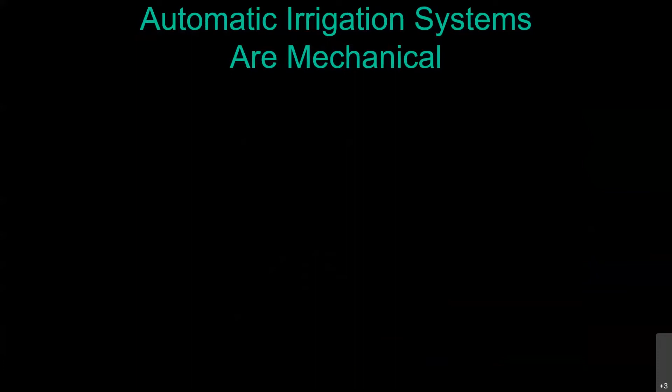One of the things we have to remember is these irrigation systems are mechanical in nature. So that means just like our cars, they need to be maintained. You need to change your oil at regular intervals. You want to rotate your tires and all that sort of thing. But just like with our cars, maintenance is going to take care of most of the problems you can have in your irrigation system before they become big problems, or at least you're going to catch them before they become those giant water bills, mainly just by paying attention.

So yeah, you can kind of try and save some money and not get your oil changed for a while, but if you push it too far, you're going to find out just how expensive it is to put a brand new engine in your car. That's not where you want to be at, and you don't want to do that with your irrigation system either. I hate to tell you though, installation is only the beginning. These systems are automatic, they're expensive, but that's the problem with a lot of these irrigation systems: without maintenance, plant health can suffer, sometimes to death, especially with these drip irrigation systems.

You've got these drip emitters that are putting out the water at very, very low rates, 1/2 gallon per hour, 1 gallon per hour, 2 gallon per hour. It doesn't take much to get inside that system and clog up an emitter. And if you're not paying attention, now all of a sudden your plant goes into stress. And if you let it go far enough, well, that can be the end of it. The system can deteriorate to the point where replacement is the only option, particularly with drip irrigation systems, because the water works at a lower pressure in a drip irrigation system and the water is moving slower.

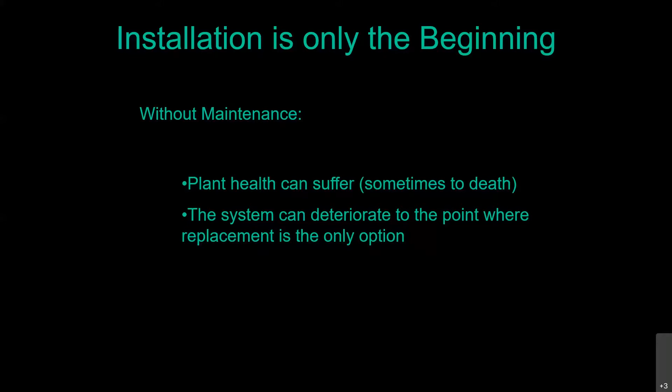So I've heard people over the years say with a completely straight face that these polytubing drip irrigation systems will last about 8 to 10 years. That's absolutely ridiculous. That polyethylene tubing is not biodegradable. What kills drip irrigation systems early is bad design, bad installation, and zero maintenance. You put those three things together and you're right. A drip irrigation system is only going to last you 8 to 10 years, whereas if it's properly cared for, there's no reason for not having this system in the ground 30 years after installation.

And of course, very important to all of us in the desert here is water can be wasted. We want to make sure we're not using any more water than what we need, because taking more water out of the reservoir that we don't need gets us in trouble, especially with all the issues we're facing with the Colorado River water. And I don't know if anyone's been up to Lake Mead lately, but as you pass over that bridge and you look down at Lake Mead, you see that big giant white ring around there. That was where the water level used to be. So we want to make sure that we're doing everything we can to keep that water up in the reservoir so we can survive this climatological drought, not a water supply drought.

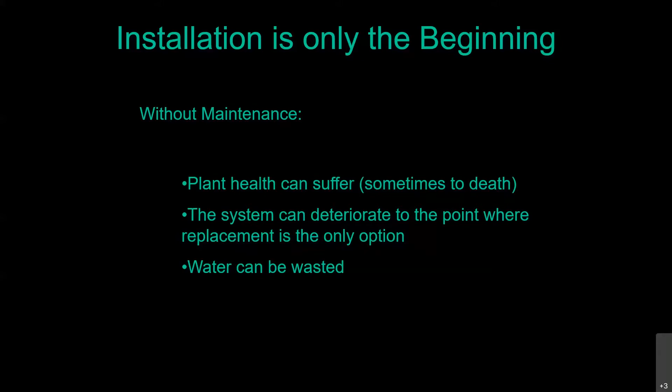We have adequate water for what we need, but the climate side of it, if we're not careful, that system is going to drop down to the point where all of a sudden we have to start imposing restrictions on people. And that's not what we want to do. We want to help you use your water wisely. We don't want to become water cops.

So not only do you have an irrigation system, if you're like me, you came to the desert from somewhere else. I just happened to do it a long time ago, where back where I grew up, our concept of irrigation was just waiting for it to fall out of the sky. It worked really, really well. But here we've got these automatic irrigation systems. So we've got our sprinkler systems for our grass. We've got our bubblers sometimes for our large high water use trees. That's an effective way to water those.

And even if you're not from here and not familiar with irrigation, when you see a sprinkler head pop up and start sprinkling water on the grass like a rainfall event, it's kind of easy to understand what's going on. But then we have these drip irrigation systems where you have these little black skinny tubes sticking out of the ground. It's a much more alien irrigation system, especially to newcomers.

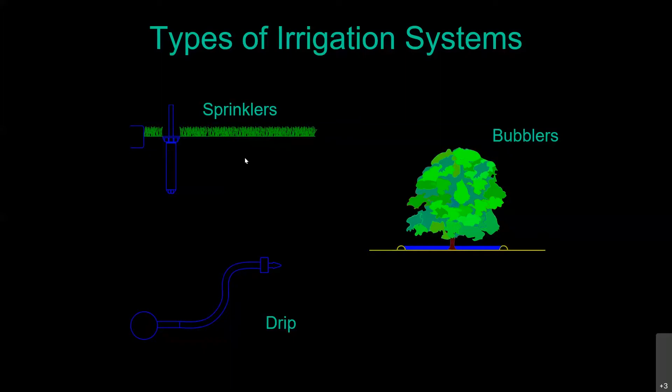So kind of a start to finish on your components of a typical drip irrigation system is you're going to have, if it's an automatic system, a controller mounted on the wall or inside your garage. Now where the water supply is coming into the house, that's typically where you're going to make your connection, and hopefully you have a good backflow preventer. That's going to keep the water, once it goes into the irrigation system, from being able to come back into your drinking water. You want to make sure you have that proper backflow prevention.

With this style, we're actually able to install our irrigation valves underground in those boxes so they're protected, and it also means we don't have to look at them. That's one thing about irrigation components. It's mechanical, it's engineering. It's not all that attractive, so we go to great lengths to hide this stuff.

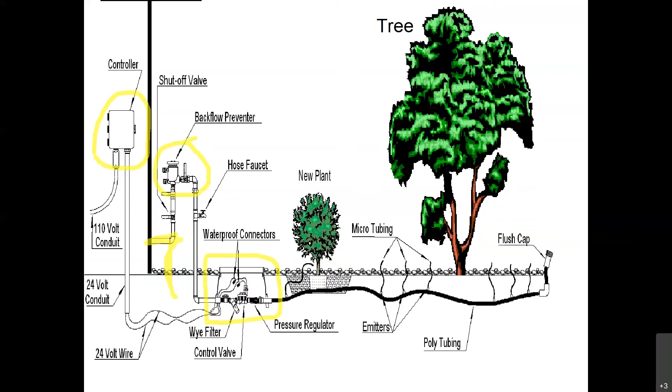I've joked for years that we do these classes where we talk about plants, and if we accidentally mention the words hummingbird or butterfly, we'll get 150 people signed up for that class. When we teach classes about irrigation, how to design it and put it in and how to take care of it, we get 20, 30 people for that class. Plant people get all the glory. Us irrigators are merely tolerated. Because plants are pretty and people like to look at them.

Now with the drip irrigation system, it does work at low pressure, so you're going to have a pressure regulator down next to that valve. And because those emitters have very, very small holes to let out that water at that slow rate, you're also going to have a filter. And we're going to actually show you a real one, so you're not just looking at a picture.

Once you leave the valve box, that's where you transition to your flexible poly tubing, and you're just putting in your emitters wherever you need them. And at the end of every line, you want to make sure you have a flush cap so you can access it and clean out that tubing. Let's get rid of our annotations there.

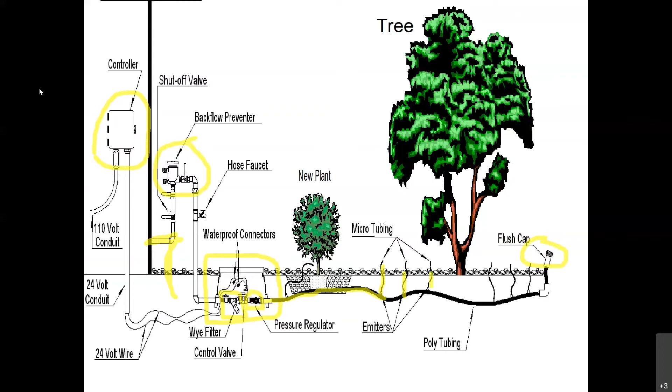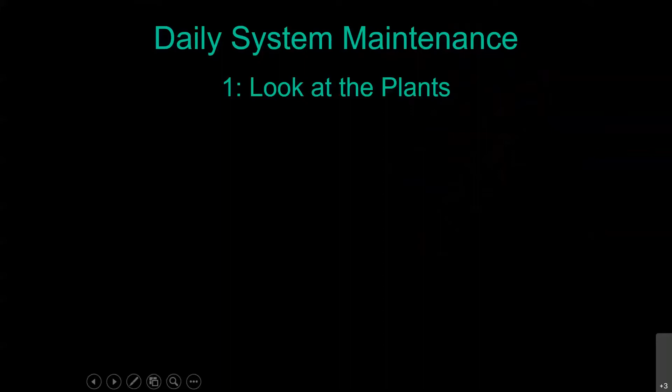Okay, so now for any type of irrigation system you always have your daily irrigation system maintenance, and thankfully we're not all in a room together like we normally do because nobody's giving me dirty looks or throwing anything at me. Really all I'm talking about is just paying attention to what's going on. First thing you want to do is look at the plants. They're going to be great indicators of what's going on with your irrigation system.

So you can see all the different signs of overwatering or underwatering in that fantastic brochure called Landscape Watering by the Numbers. If we were all in the room together, I'd say it's included in your packet. But it is available both in hard copy from your conservation office, and it's also available in a digital format.

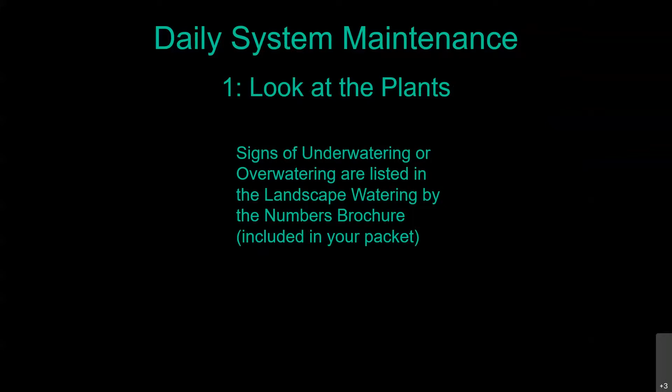But it can be a little bit confusing, because when the very brand new leaves at the very ends of the stems are wilting in the afternoon, people assume that's underwatering. It's not, it's actually overwatering. Now, if your leaves are turning brown, and especially if they're curling upward, that's definitely a sign of underwatering. But really the way to find out is to use a soil probe. Just a nice long metal rod. It will not push into our dry soil, but it will slide with little resistance through the moist soil. So that way you can really tell what's going on with the moisture level in your soil.

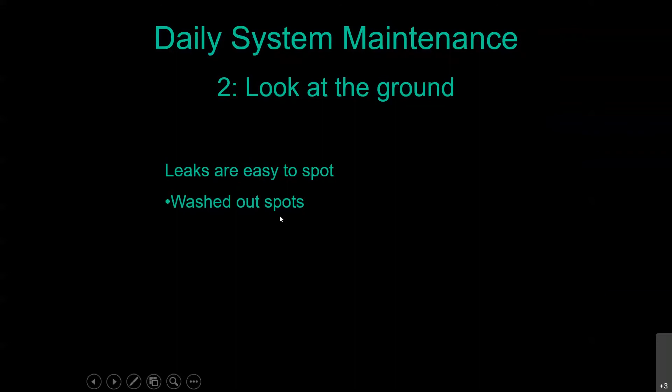Go ahead and look at the ground. So go ahead and take a look out there for leaks. They're pretty easy to spot. We have our desert plants out there, but the yard is not completely covered wall to wall in plants. So you can look for those washed out spots. So even without turning on that irrigation system, we knew we had a leak in that drip line there. So we needed to get in there and make a repair.

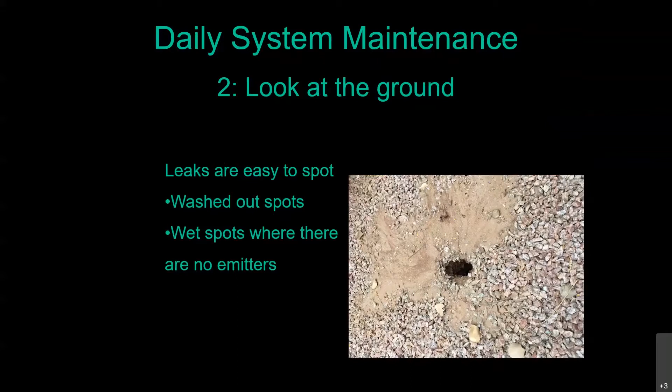And also pay attention when you're starting to notice wet spots and you don't have any plants or emitters there; it's time to turn that system on, go out and find out what's going on. The last thing you want to do for daily system maintenance is just pay attention to your hardscape.

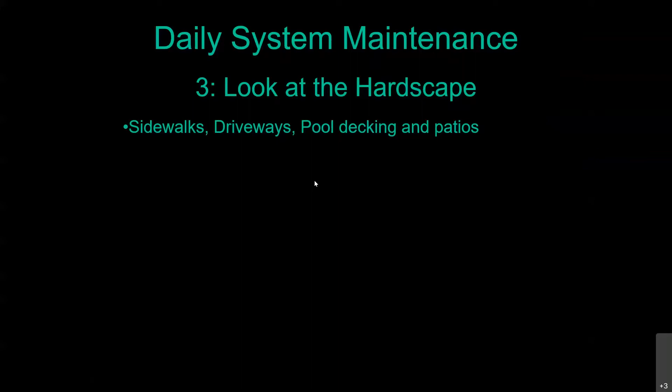So you're going to be looking at your sidewalks, your driveways, your pool decking and patios, and you're going to be looking for any of the staining you'll get from the minerals we have in our water. And the ones we're really thinking about here are the calciums and the salts. So definitely pay attention to your walls and fences, especially if you have sprinkler systems, like in this example.

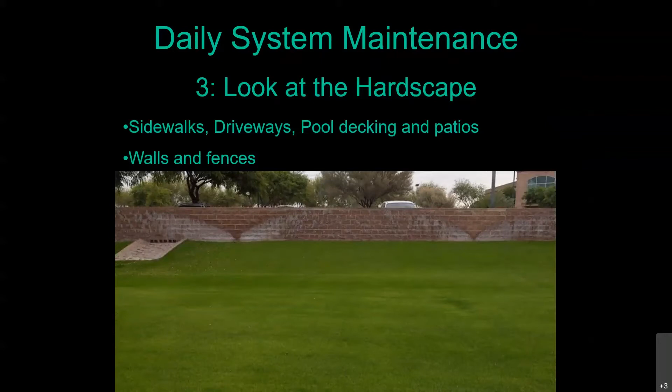They're just using the big rotor sprinkler heads that rotate back and forth, and they've got them out of adjustment. So every time they get to each side, they continue to turn and they spray that water up against the wall. So now that beautiful colored block wall they have there has got all those calcium stains on it. But seeing those stains on your flagstone or your brick patio decking and things like that, you might have a blown emitter out there that's actually shooting water over onto your patio. So it's time to turn that system on and see what's going on.

So for monthly system maintenance, no matter what type of an irrigation system you have, this class, when we do it normally in person, it's a 3-hour class. And to try and shorten it up, I took some of the common components out of any irrigation system that you would do for maintenance and put them in the beginning. I just forgot that I broke it up into the individual ones this time. So we're just going to cover them here, and then we'll get into the drip irrigation specific stuff. But these are things you want to do no matter what type of an irrigation system you have.

The first thing you want to do is turn the system on. Turn it on in the daytime. We run our irrigation in the middle of the night so we don't lose as much water to evaporation. So you want to actually turn it on in the daytime. Don't go out at 2 in the morning with the flashlight to inspect your irrigation system. The other thing is while you start at the controllers, you want to make sure you have the correct program in there for the season.

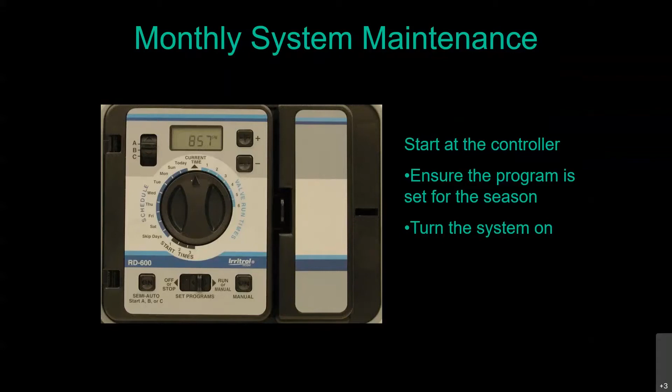People do not adjust their irrigation timer programs often enough to account for the changing weather. The old joke is if you don't like the weather, wait 5 minutes, it'll be different. Some weather component will be slightly different from 5 minutes to 5 minutes. But definitely at least 4 times a year, change your watering schedule, or even better yet, once a month. So you're going to go ahead and turn the system on. There's another great reason to start at your irrigation controller, and that's because you're standing up and you're still dry and not muddy.

So for semi-annual system maintenance, no matter what type of a system you've got, if your controller has a backup battery in there, that's designed to retain the program information in case the power goes out. So very often in the back of the panel, you're going to find a typical 9-volt battery. Do check with your controller manual as far as what type of battery to put in though. If your controller uses a rechargeable 9-volt battery, every 6 months is too often to do it, because the controller is constantly recharging that battery when it has power. What you don't want to do is put a regular alkaline battery into that controller, because recharging regular alkaline batteries is a bad idea.

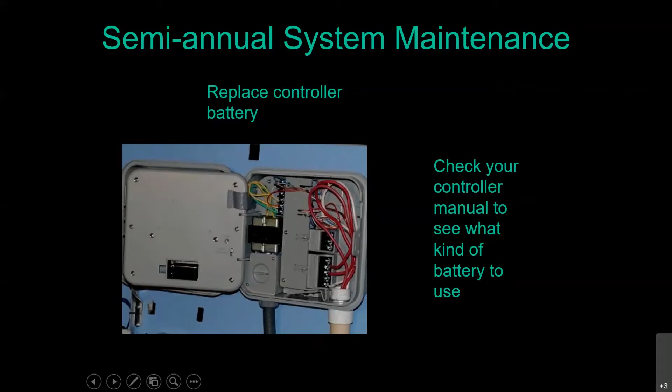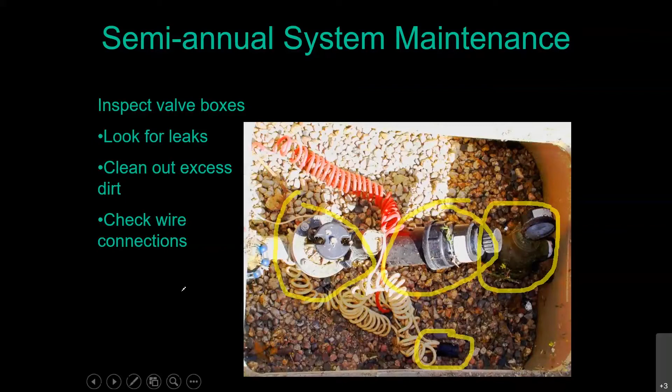One of the most common electrical failures you'll find in irrigation systems is people do not use the right connectors inside those valve boxes. So what I'm going to do here is drop out of our presentation so I can show you what we're talking about. Let's get up to stop share. There we go. Okay, I got a pretty good sized view on me. Unfortunately, many people will make those wire connections inside that valve box with a typical wire nut. These make good wire connections.

This is what's going on inside the walls of all the buildings and things like that. But what's done here is the ends of the two wires have just been stripped of some of their insulation, and you put it on and twist it until it's snug. The problem is underground in a box with a lid on it, there is a lot of condensation and moisture in there, so the exposed copper at the ends of those wires will begin to corrode. It's a very, very low voltage signal coming from that controller, so a little bit of corrosion here means the signal never gets to the valve and it doesn't open.

What some people will do is they do make a type of wire nut. This one is actually larger than what you would probably use. I use this to pass around so people can see. But these are filled with silicone, and they've got those little flanges there to make sure the silicone doesn't leak out. So this still works like a standard wire nut. You put it on and twist it. The problem with these, though, is if anyone does need to replace that solenoid on that valve, they're going to take this off, replace the solenoid, and then put it right back on. There's no more silicone left in there, so now it's just a standard wire nut.

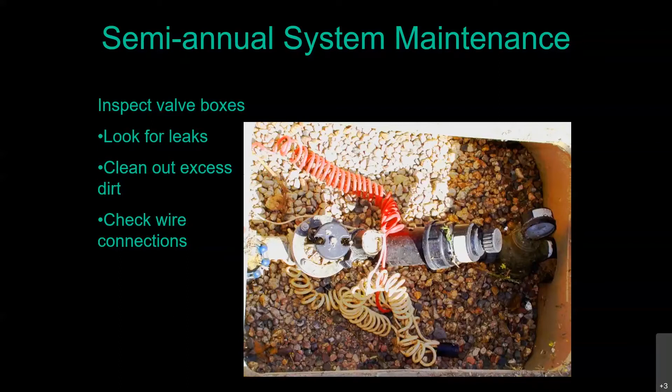That means I'm not talking about bugs or termites. I hope you did not put in an irrigation system for the termites. What's attracted to that moist soil is the roots, especially tree roots. I don't have the sample anymore because it got too old and dried out and crumbled, but I had a sample of an irrigation valve I removed that was completely engulfed in tree root just from a very small leak inside that box. So make sure they're not buried in the dirt.

For annual system maintenance, no matter what type of an irrigation system you have, you may want to consider when that backflow preventer was last tested. So the most common type and the most preferred type we see out here is the one I'm showing in this picture. That's this guy right here.

That is called a pressure vacuum breaker. So this is an assembly that can be tested. It does have the ports here where a certified backflow tester can hook up his gauge and trick that assembly into thinking the water's running backwards and make sure it's functioning properly.

We do require commercial customers with dedicated landscape meters, which aren't serving anything inside, so it's not anything to do with human health or safety, to test every year. If they don't test them, and we remind them and they still don't test them, we will shut off the water to that irrigation system and lock that meter, and they can't have water for that landscape until they test that backflow preventer and ensure that our system is protected and your drinking water is protected.

A residential backflow preventer being tested every year is overkill, but if it's been about 3 to 5 years, you may want to consider having that done. You can usually find a list of certified backflow testers, certified by the state, with your local water department. Call a bunch of them so you get a good idea of the current rate for testing those assemblies. Most contractors are honest, hardworking people, but there are thieves and crooks out there, so make sure you have a good understanding of what that cost should be.

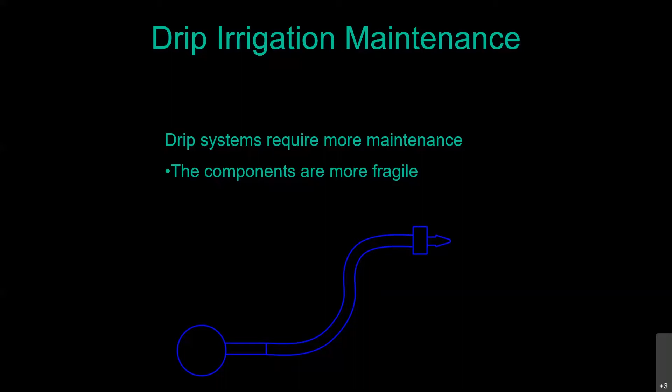Instead of just punching in new holes and connections into that flexible poly tubing when you add new plants or need new emitters as plants grow, you're cutting out pieces of that PVC pipe and gluing in a new fitting so you can attach a new emitter. If you don't know where your poly tubing is and you're digging holes in your yard, I recommend you have it on and running when you're digging. That way, if you accidentally hit it with your shovel, you'll know right away you need to do a repair and flush that dirt out of there.

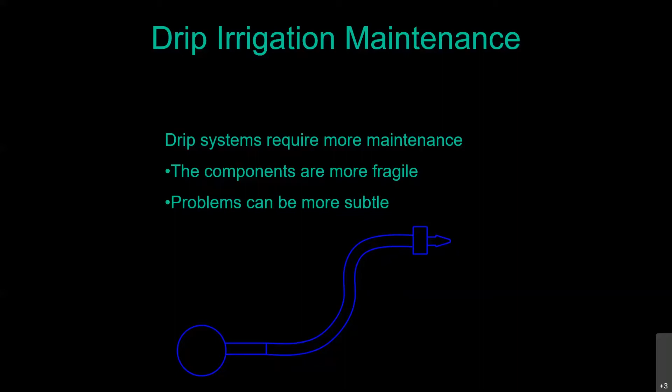The other thing is remember, it is a low pressure system, so the problems can be a lot more subtle. People with sprinkler systems who've had a broken sprinkler head recognize that right away because they've got a 20 or 30-foot geyser of water coming out of the ground. You do not get that with low pressure drip systems, so take the time to get out there, walk around and inspect it.

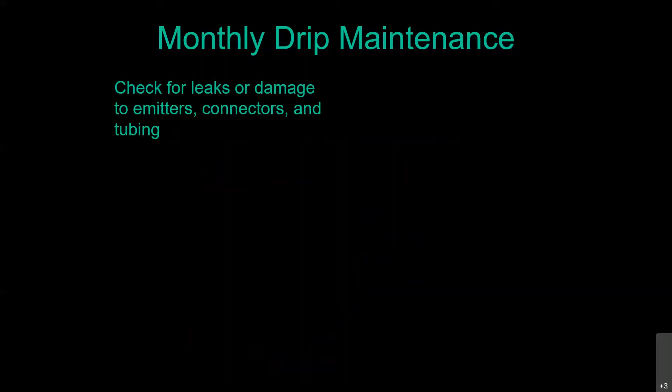For monthly drip irrigation system maintenance, turn the system on and walk through the yard to check for any leaks or damage to your emitters, connectors, or tubing, and make sure those emitters are flowing at the correct rate. Make sure you don't have clogged emitters, that they're not blown and putting out more water than they should, and that your emission points are still visible.

There are two things underground you do not want in your drip system. One of them is the ground. Dirt is the enemy of a drip emitter. The other thing is, remember what in that yard is attracted to moist soil. So make sure you don't get any tree root intrusion into your drip system.

If somebody who put in your drip system did not bury that poly tubing at the correct depth, it should be 6 to 8 inches below ground. It does have a nasty habit of working its way back out of the ground. That's going to deteriorate very, very quickly in our sunlight, become brittle, and it is a leak waiting to happen. So make sure you get that stuff underground right away. If it's got that shiny crystalline look to it, it's already been degraded by the sunlight. Cut it out and put in a new piece of tubing.

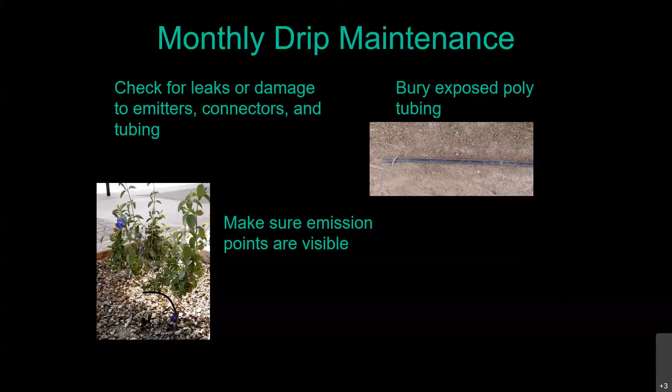And you may want to consider, even the best gardeners out there are going to have plants die. Plants are mortal just like we are. So if a plant dies in June, do you really want to go out at 116 degrees and dig a hole to put a new plant in the ground? You may want to just wait until fall, which is a better time to do planting anyway. It's better for you and it's better for the plant.

But do you want that emitter location to continue to run through the summer where there's no longer a plant? Well, that's where this guy comes in. This guy right there just plugs right into the end of that 1/4-inch tubing, and he's called a goof plug. You can pick those up anywhere, home improvement stores, hardware stores, or your irrigation stores.

So let's go back to that first slide. If you don't run into any problems and everything's working okay, this monthly maintenance check on your drip irrigation system on a typical residential yard is about a 3-minute stroll through the yard. This isn't going to take a lot of time. If you run into some problems, then you've got the time for the repairs, but just make sure you do it once a month, make sure everything's working okay.

You know, you pay a lot of money for these landscapes, and if you put it in yourself, you paid a good amount of money, plus you've got the blood, sweat, and tears involved in putting it in. So actually get outside and enjoy the yard. Don't just look at it from your kitchen window.

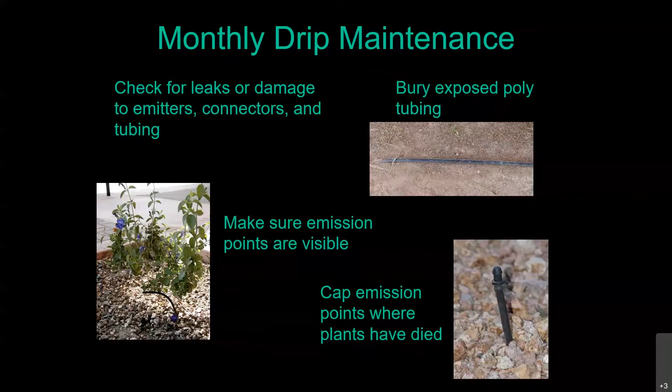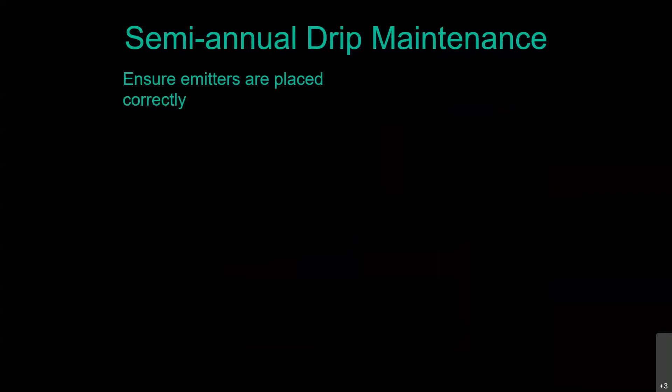One thing you want to focus on when it comes to irrigation, stop thinking about watering plants. You're not. The thing that you're watering with your irrigation system is the roots. And once you make that transition in your thought process, how we tell you to do these things all of a sudden makes a lot more sense.

So here we've got a commercial site, I took a photo of this because it was so wonderful. The designer who did this irrigation system knew that nobody was going to move those emitters out away from the base of the tree, and they were not going to add more in as it grew. Because as that tree gets bigger and bigger, it needs more water delivered to it when you water. So he actually specified he wanted 6 4-gallon per hour emitters.

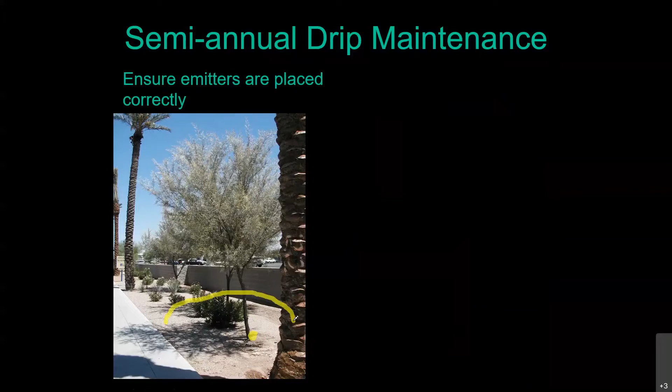And what he wanted was one of them right at that original root ball, where that container came from the nursery. And he wanted the others spread out here, where the future edge of the canopy of that tree is going to be, what we refer to as the drip line. So while you're waiting for that tree to grow and you're irrigating out in areas 10, 15 feet away from the tree, you could argue that you're wasting water because during the first couple of years, you're watering in an area where the roots haven't gotten to yet.

I work in water conservation, but I live in the real world. Nobody moves those emitters out. Nobody adds them in as time goes on. So in our design and installation class, we tell you to put them in at the time of install.

Now, on a residential scenario, if you don't want those outlying emitters to be watering until the tree actually needs them there, don't forget about those goof plugs. You can just temporarily cap them off. Later on, clip off your goof plugs, put your emitters on, and you're in business with the right amount of water in the right place for that tree. And you didn't have to do any more digging. Unfortunately, the person who did the install did not quite understand the concept of what he was supposed to do.

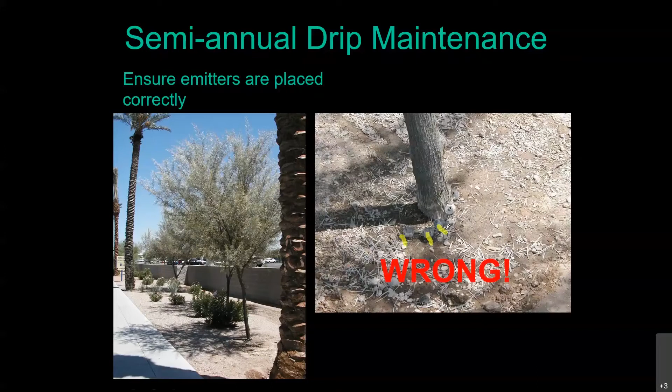So what you see here is 1, 2, 3, 4, 5. Emitter number 6 was right around the backside of the trunk of that tree. So he did put in the right emitters, but he certainly didn't look at the installation details and put them in where they were supposed to go.

So the other thing that's going on here is, do you see that nice little white ring on the trunk of that tree? It's called the Salt River for a reason. There is a sodium content in it. So fortunately, that particular species is pretty salt tolerant, and it hasn't been killed with that yet.

Another thing that's going on here is, look at how moist that soil is around the trunk of the tree. So remember, when our soil is dry, it's the consistency of concrete. Before we want to dig a hole, we know to get it wet so it becomes plastic and pliable. Where the tree is anchored to the ground, would you prefer the texture of concrete or the texture of Play-Doh? This is why trees fall over.

This is why every time we have a storm, you look at the evening news and you're going to see some poor weather person out there standing next to a tree laying on the ground. So what you do want to do is water at what we call the drip line. Now you also want to do this with the shrubs, but I'm really using trees as the example because it's a lot more obvious. So this is where the water absorbing roots are.

All the water absorption on your woody shrubs and trees happens at the very ends of the roots. And that's what you want to encourage to grow deep and wide, because the roots are what bring up the water and the nutrients. They're also what hold the tree upright in the ground, even in our big windstorms. So even with your shrubs, you want to do this because not only is it the right place to water, they're also easier to inspect and repair if they do get clogged up.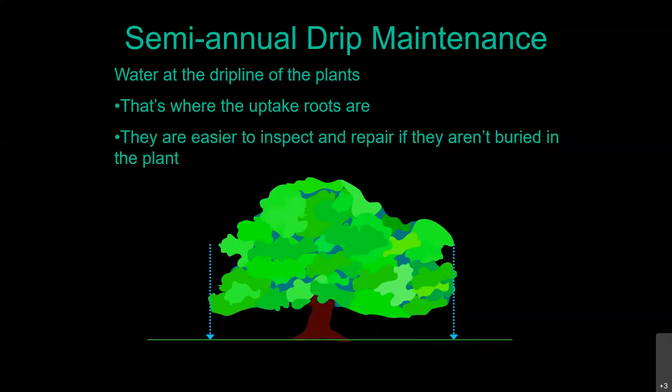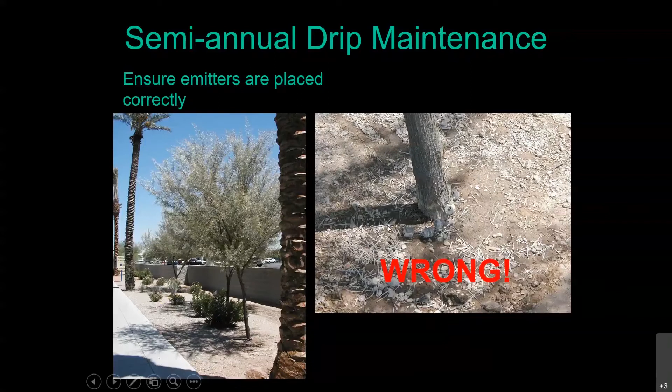When you first plant them and you have your emitters out here where they're not needed until the tree grows there, remember those goof plugs that we showed you? That's what you're going to put in those locations until the tree actually gets out to the point where it's going to utilize the water from there. Whereas in this scenario, they're just completely in the wrong place where they were all put right up on the original root ball and never moved out. Cool. Perfect. Thank you.

Okay. So what happens if we don't move them? Well, sometimes the trees ignore our foolishness and they ignore those emitters that are still right up at the trunk and they put out their roots anyway. Sometimes you can get lucky that way. But many of our desert trees have the adaptation. They've evolved over the eons, knowing that rain events in the desert are very few and far between. So during the rainy season, they do all their growth up on the canopy. During the dry season, they do the root development.

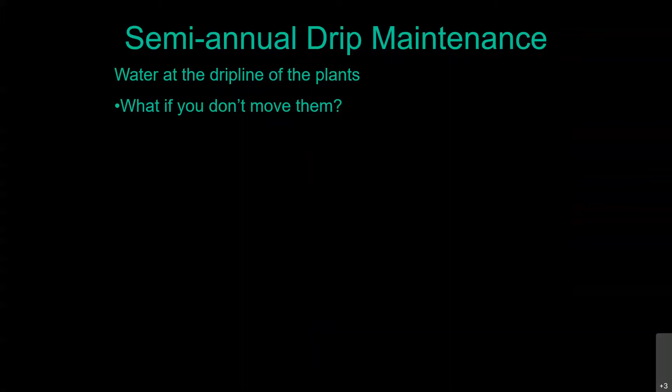So now you've got all these trees in the urban landscapes out there with 3 2-gallon per hour emitters at the base that are never moved away, and they're running 3 days a week year round. You don't have a dry season. So sometimes what you will see happen is this. That was one of the hybrid Palo Verdes, and when it was standing up, it had about a 25-foot wide canopy. Now, this one did go down in the rain, but it was a winter rain. There were no high winds involved. It was just a nice, slow, steady rain that soaked into the ground and saturated it.

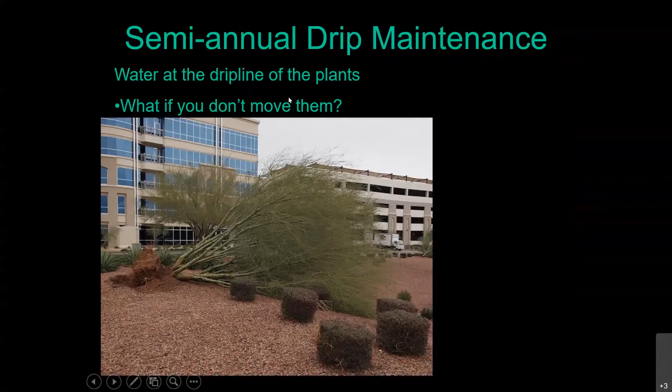So when I started walking up to this to take some photos, I mentioned to my coworker, boy, they really spent a lot of money on that tree. They put in a 48-inch box tree. How could I know what size that mature established tree came from the nursery in? That's 48 inches, and that's 48 inches. That tree just never bothered to grow roots. They actually tried propping it up and tying it back to the ground, but at that point the root system was so destroyed and damaged, it just ended up dying and had to be replaced anyway.

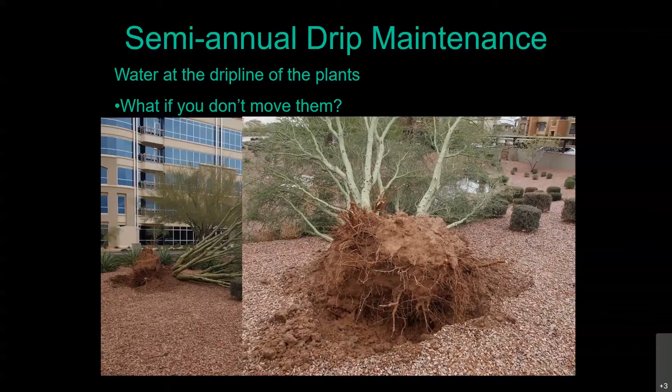So you're going to have a lot more success by making sure the focus of your watering is on the roots, not on the shrub, not on the tree. You're watering the roots. You'll be much more successful. Here's a couple more examples of that real quick. Once again, I could have taken a tape measure to that and measured 48 inches. Magical.

Okay. So for annual drip system maintenance, only once a year, you're going to want to flush out those filters. The water that comes from our water treatment plants is very, very clean. There's nothing in it. However, how many miles of pipe does that water go through before it gets to your house? And how old are some of those pipes? So you can get some sedimentation from our water distribution system, and it will clog up your emitters. That's why we put filters on those drip systems.

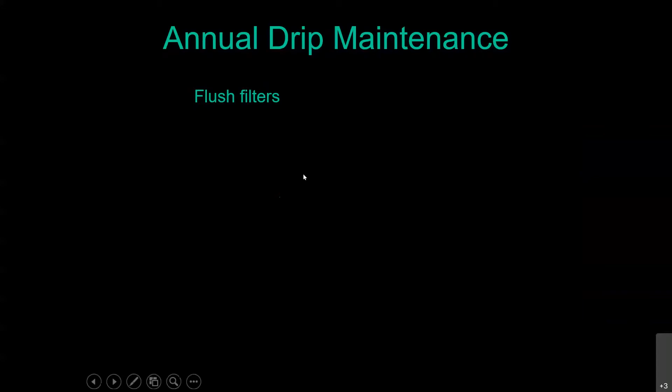So once a year, you do want to flush them out and actually take them apart and inspect the filter elements. I'm going to drop back out of our presentation so you can see what these look like. There we go. Most of your filters are in this configuration. They're what we call a Y filter. What you're going to do is unscrew it, and inside there, you're going to see a mesh screen. Most residential drip systems use these ones that have a nylon mesh screen.

You can get them in different mesh, whether it's 100 mesh, 150 mesh, or 200 mesh. You want to make sure you're using 200 mesh screens in there. That way you're protected all the way down to half-gallon per hour emitters. Now, on this particular filter, to be installed correctly, it needs to be pointed downward, because that way when we open it up, anything caught in that screen will come out with this. If we did it the first way I showed you, everything's going to fall right back in there and go out and clog up your drip emitters. That's why most of your filters nowadays, there we go, here's our big display, have this flush cap on top.

So what you're going to do is before you open it up, you're going to take this cap off, and then you're going to actually use the valve itself to manually open it. So you're right here and can see what's going on rather than back at the timer. And the water's coming in this direction and you're in front of the pressure regulator. So you're at full pressure and that water is going to shoot right out of that valve box in a

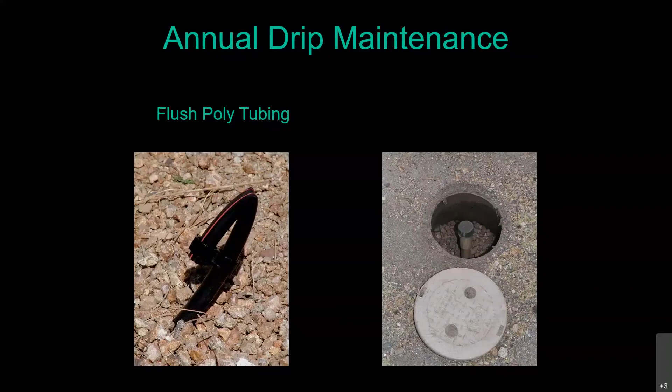A preferred way to do it is to actually install them down underground in this box, but in this case we want to use a threaded cap inside there rather than these fold over ones. These fold over ones, if they're inside the box, you're not going to be able to open them up. So real quick, we're going to show you what to do if you're kind of looking at an overhead view of an irrigation system here.

So on this irrigation system, we do have a separate valve for just our shrubs and then a valve for just our trees, the yellow line here. So very typically on your residential irrigation systems, they will do it in one long run, like what they're doing with this tree here. And in this case, we're going to have a flush cap right there.

So we're going to open it up and we're going to turn that station on either manually at the valve or at the timer. And if you have not flushed out your system and you've been in that home for multiple years, I want you to be standing over here so you can see what the water looks like when it first comes out of that tubing. You will become a firm believer in flushing out those lines once a year because the water, what first comes out of there looks like kind of a mixture of Kaopectate and chocolate milk.

Now that's one big long run on there. However, on our shrub line, we're using more of what we call a trunk system. So here's the red line and the red valve for our shrubs. We're coming out to here. Here we have a flush valve. We're also, oops, let's not move that. We are also coming over here to these shrubs and we would have another flush cap there and another flush cap here and another flush cap here.

In that scenario, what you want to do is start with the one that's closest to the valve and you only do them one at a time. Don't open all 4 of them at once and turn on the valve because the water is just barely going to ooze out of each one. You're going to do them one at a time, starting with the one closest to the valve, so that way when you're doing the one that is furthest from the valve over here, you've already flushed out this segment of the tubing by doing it first with this one. So it's going to make it a little bit easier to do it.

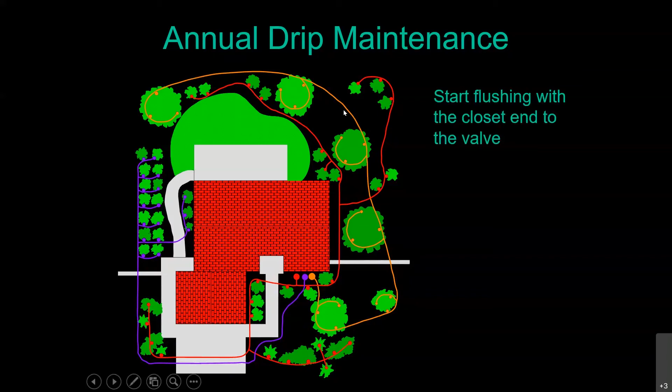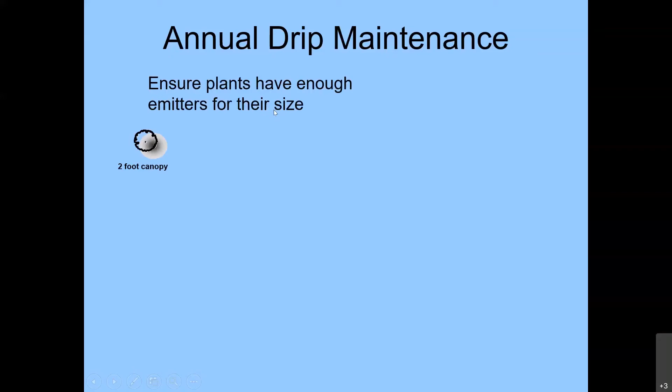Okay, so yeah, I had to change the color on the screen because I wasn't able to change the color on my drawings here. This is where, as these plants grow, you're going to consider adding in more emitters. Here we've got just a 2-foot diameter canopy plant, but you see the wetting pattern of that one emitter. We're irrigating a good 50% of that root system with one emitter. But as those plants, and especially our trees, start growing, you're going to want to start adding in more and moving them out. And here we've got a fully mature tree.

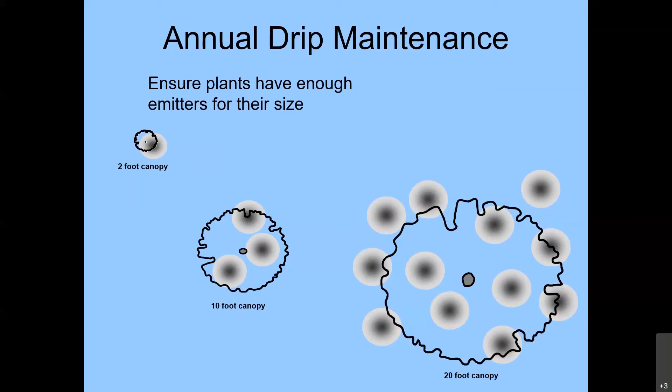Now, actually, some of these emitters that are still under the canopy may be emitters for shrubs. The majority of your water-absorbing roots are going to be out here, but the tree can still have some down under here as well. So I would actually count the emitter for that shrub as partly watering the tree. Hopefully, if it's a correctly designed system, your shrubs and trees are on different zones. This one isn't; this little guy right here just isn't watering as deeply as the ones that are specifically for the tree. So we'll show you in a little bit just how to add in more line for that when we get to the repair section.

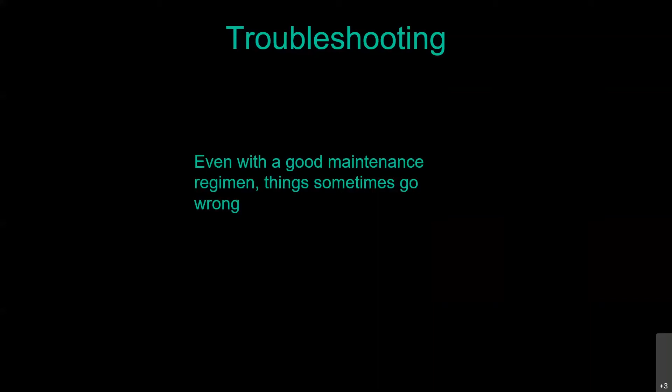Okay, so now let's get to troubleshooting here, and it's already 50 minutes, so we're going to go through a few of these things fairly quickly. Even with a good maintenance regimen, things will go wrong, and irrigation systems know when Home Depot closes, so it's Friday night at 11 o'clock when you hear the water gushing outside.

So some of your more common things here, and these are all included in the handout you received the link for, and that handout is for the full class, so it also has information on sprinklers and bubblers. Very often when things go wrong with the system, people automatically assume it's a bad timer. That's the part that's above ground, the part that people can see, so they always say, must be a bad timer. A lot of times it's either a programming error or the real problem is somewhere else in the system.

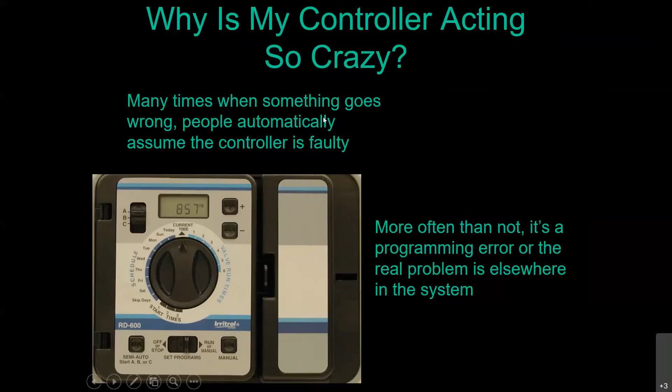So a really great one when I worked at Rain Bird Technical Service, where anyone in the country could call me toll free when they're having problems with their irrigation. Sweet little old lady was firmly convinced her timer was under some sort of demonic possession because the irrigation stations kept running over and over again right after themselves. The cause on this one is actually a programming error. She put in extra start times. She thought those start times started individual stations. They do not. One start time starts the cycle of all stations in that program, one after another.

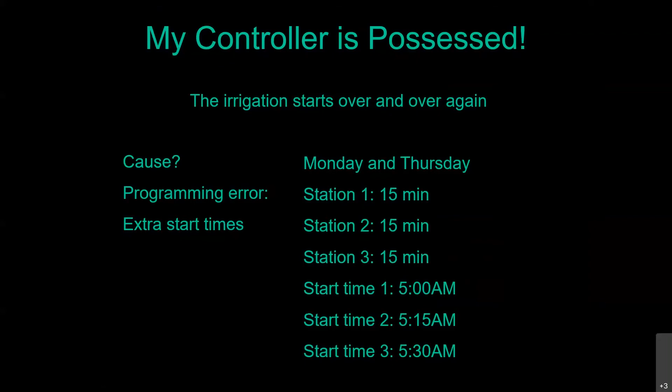So in this scenario, she had it set for Monday, Thursday, had 3 stations watering for 15 minutes because that's what she wanted. If she wanted one cycle of those 3 stations starting at 5 in the morning, she would put in one start time of 5 a.m. Unfortunately, she thought start time 2 started station 2, and start time 3 started station 3. So actually, each station ran 3 cycles of 15 minutes, one after another, for a total of 45 minutes.

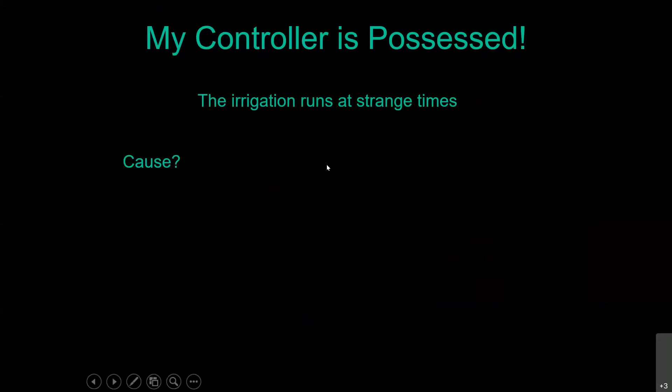Very common programming error. Another good one is the irrigation runs at strange times. Could be a programming error. Be careful of that AM and PM when you're doing the programming. If you get one of them wrong, either current time or start time, your 5 a.m. start for your sprinklers interrupts your 5 o'clock in the evening barbecue.

Or it could be there was a power failure and your backup battery has died and it's gone back to the default program, always in the number 1 or A program, set up to water every day, all stations for 10 minutes and 1 cycle. And they typically put in, depending on the manufacturer, either a 5 a.m., 7 a.m., or 10 a.m. start time. But when the power comes back on, the controller thinks it's midnight. So it's 5 or 7 hours later when the irrigation actually comes on.

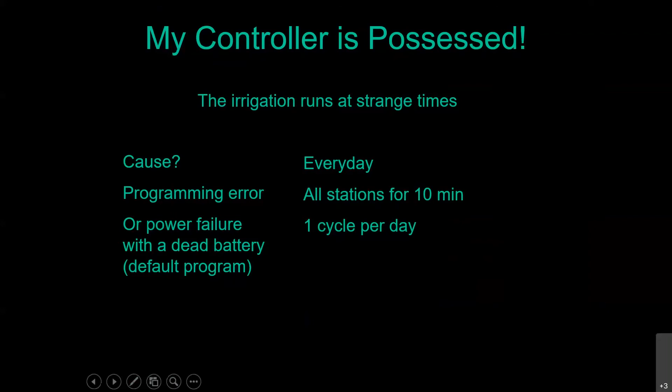So reprogram your controller and put in a new backup battery so you don't have to do that again. Another good one is the irrigation runs longer than the times that are actually programmed in there. This is still a programming error. A lot of these controllers have this percent adjust or water budget feature that runs a percentage of the programmed runtime. So we've got station 1 set to run for 10 minutes, but it actually runs for 20. That means our water budget is set at 200%.

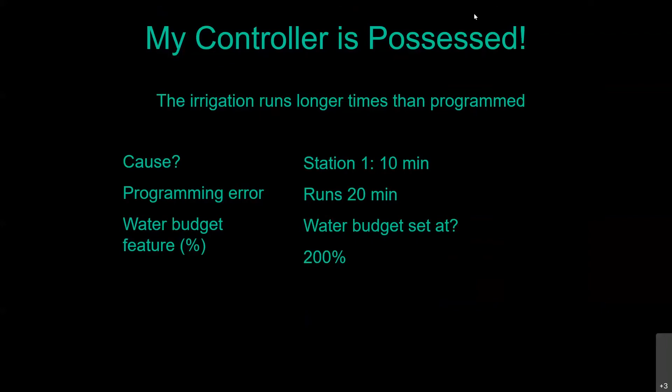Now, your newer versions of timers, I think the manufacturers got too many complaints about this being a bad timer. The old ones, no matter where you set that water budget, it would not change the runtime displayed. A lot of your newer models, if we change that water budget to 200%, now when we looked at the runtime for station 1, it would now say 20 minutes. But your older ones won't do that, so make sure you're very careful and pay attention to that function.

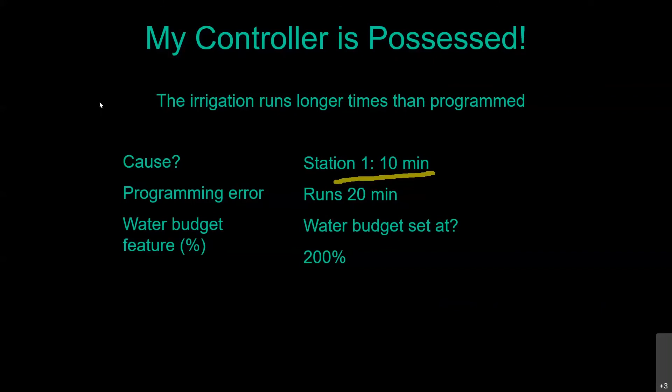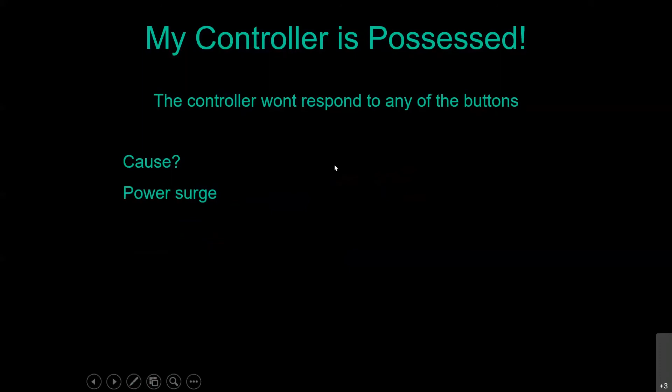Another good one is the controller doesn't respond to any of the buttons, no matter where you push the dial, how hard you push them. You've had a power surge that has locked up that microprocessor inside there. So what you're going to do is reboot that controller. There's no Control-Alt-Delete keys on an irrigation controller, so remove the power, turn off the circuit breaker, unplug it, whichever way it is. But what's inside that controller designed to hold the information on the chip if there's no power? Take out your backup battery. 30 seconds to 1 minute, power it back up. 90+% of the time, they fire right back up.

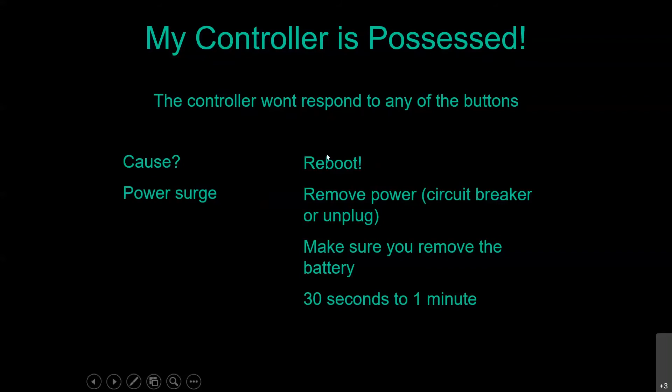Another good one is one station won't stop watering. No matter what you do, I turn the timer to the off position, it still waters. Well, first check for a programming error. Turn the timer off, and then if it stops, you know it's probably a programming error. But the problem on this one could actually be in the valve itself down underground in the box. We're going to do a real quick explanation of how to figure out what's wrong with the valve, and we're going to actually show you the inside of a valve so you're not afraid of repairing them yourself. So definitely turn the controller off. If it's still running, the problem is your valve, not your controller.

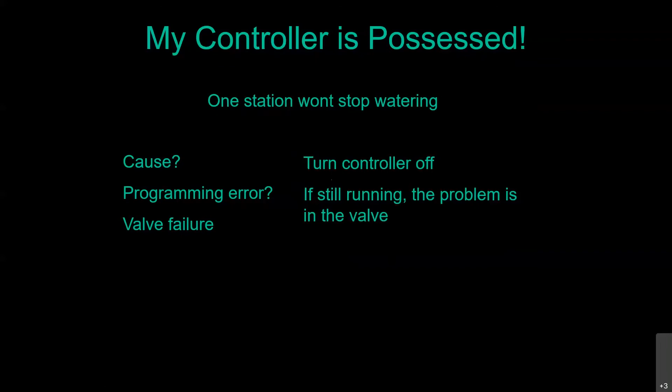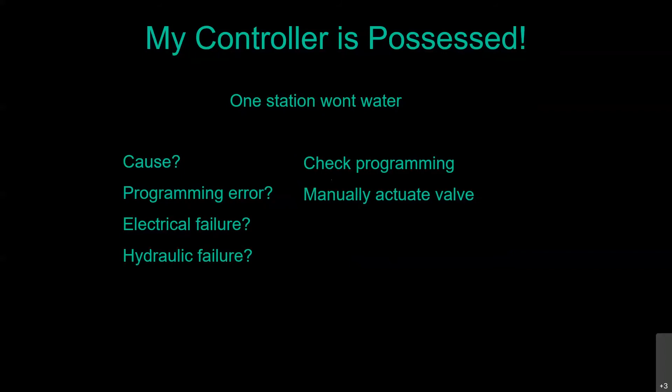Another one is one station won't water. Check your program. If you forgot to put in runtime for that station in any of the programs, it's not going to run. It could be an electrical failure, since these valves are connected to the timer by wires, but it could also be a hydraulic failure. The valves are actually using the water itself to open and close. So here, check your programming, manually actuate the valve like I showed you earlier, either that internal or external bleed.

If none of the stations water, the cause on this one could be a programming error. Always check that first. You're still standing up, you're still dry, you're not tired from digging a hole that you didn't need to dig. If you didn't put in a start time for that program, they're not going to run. It could be an electrical failure or it could be a hydraulic failure. So first check your programming. You're standing up and dry and you haven't had to dig anything yet.

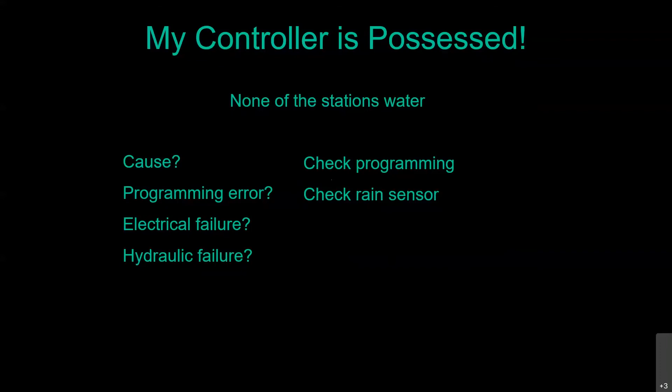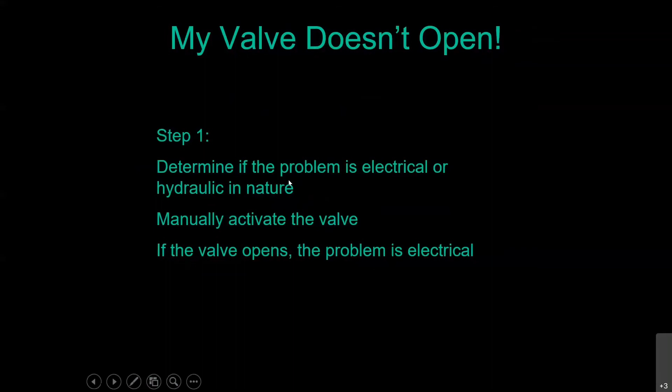If you have a rain sensor on your irrigation system, set that to bypass if you can, or take it out of the loop. If somebody's been playing with a garden hose, that sensor doesn't know the difference between hose water and rainwater. So that could be the issue there. And then manually actuate the valve. So if the valve doesn't open, is it electrical or hydraulic? Manually activate the valve. If the valve opens, your problem is electrical. If it doesn't open, it's hydraulic.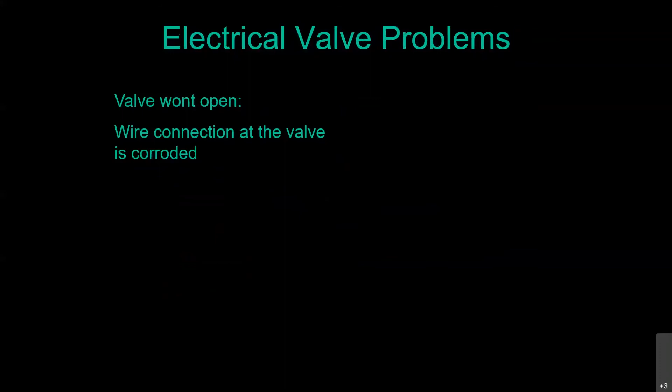Electrical valve problems: if it will not open, those wire nuts are the first thing you're going to look for. That is the #1 electrical failure, especially on residential irrigation systems. What you're going to do is remove that, cut back to clean wire, restrip it, and put on a proper wire connection. Oftentimes that'll get it working again. It could be the controller does have a bad terminal and it's not supplying voltage anymore.

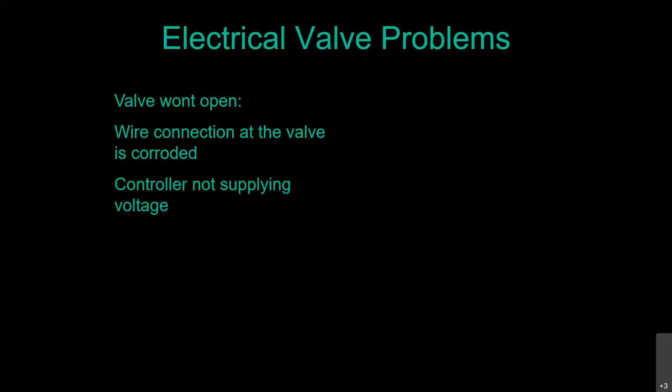Not real common, but it can happen. Hopefully, if you have a 6-station timer and you're only using 4 of them, you can move that wire over to an unused terminal, and that way you don't have to buy a new timer just yet. It could be the wiring between the controller and the valve is damaged, or it could be the solenoid itself is bad, that part with the 2 wires coming off.

If the valve won't close, it's either a programming error, or another way that controller can fail is it's always supplying voltage to that terminal. It's a very rare condition, but it can happen. Those of you that know how to use your voltmeters, you're going to check between the common and that station terminal and look to see if that timer's in the off position. You should see 0 volts. If you're seeing 24 to 30 volts, you got a bad terminal.

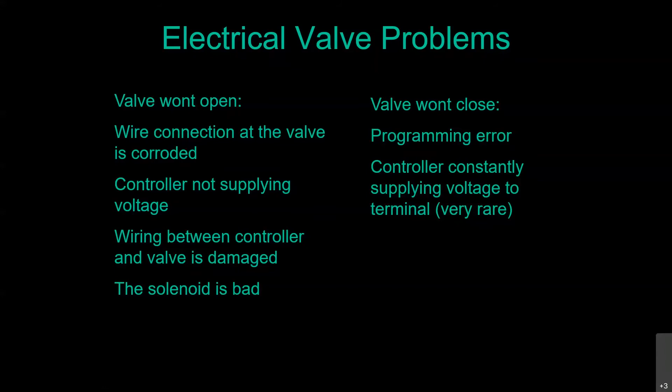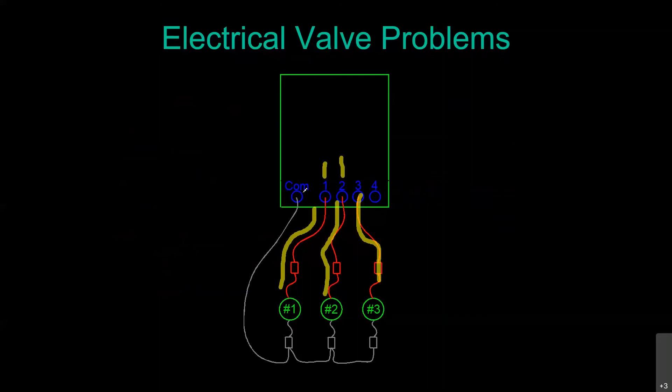So here we got a little drawing of an electrical connection, how these controllers are wired. So we've got valve or station 1, which is connected by wires to valve 1. We've got station 2, which is connected by a wire to one of the wires on the solenoid there for valve number 2. This is AC, not DC voltage. Same with number 3. Then you've got a terminal here marked C, COM, or common. That wire is connected to one wire of all of the solenoids.

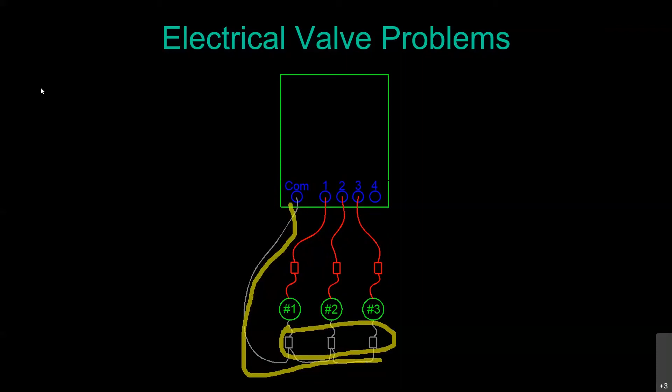So now if you've got an issue and it's only affecting valve or station number 1, it is either this wire, this connection, or that solenoid. However, if it is affecting all of your valves, then you know it's the common wire or one of these connections that is causing your problem there. That helps you figure out at least a little bit better where the problem is in the system.

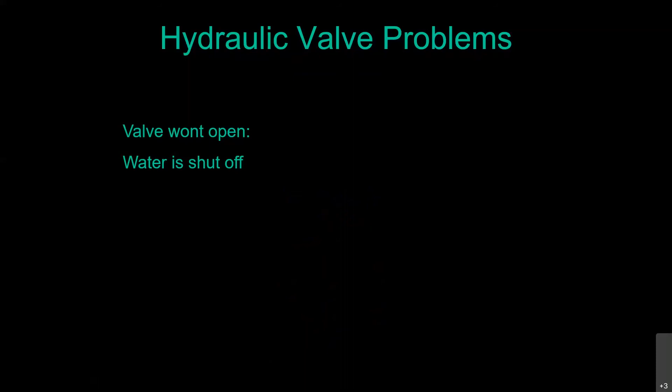When it comes to hydraulic valve problems, if the valve won't open, either the water is shut off, check that first. It may have been you had an irrigation leak that your neighbor noticed and thought, oh my gosh, I better turn that off so he doesn't have a giant water bill. And then they forgot to tell you about it. They were trying to be nice, but check that first. You haven't had to dig anything up yet. Could be dirt or debris in the valve. If the valve won't close, there's some dirt or debris inside that valve, or there's a hole or tear in the diaphragm.

So I know we're coming right up on an hour, which is about when we wanted to end this. And we are almost done, because I think about the only thing I have after this is how to make the poly tubing repairs.

So on your irrigation system, people will replace emitters and do things like that, replace sprinkler heads, no problem. But when they have a problem with one of these valves in that box, they say, oh my gosh, I better hire a professional. There's very little going on inside these valves. So like I said, you're going to turn the water supply off first before you do any of this. The solenoid is removable. And the newer ones that let you manually open the valve by turning that solenoid, a little spring-loaded plunger in there is captured so it won't fall out. If your valve doesn't let you manually open the valve by turning the solenoid, that plunger will fall out into the box, so keep an eye out for it.

So again, with the water turned off, now we can actually unscrew the screws on the top of the valve. I only have 2 of them here because I want to take it apart quickly. There is a small spring inside here. Don't worry, it's not strong. It's not going to hurt you. Just don't lose it. And then there's a diaphragm. That is all there is to an irrigation valve. So if the valve won't shut off and there's a hole or tear in this diaphragm, turn your water off, take it apart, put your new diaphragm in, put it back together. You're back in business.

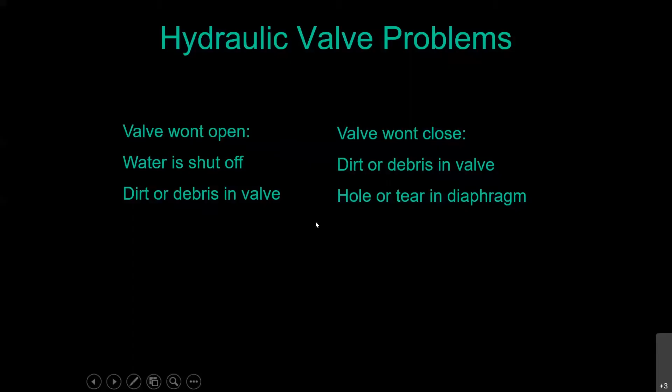Good. Okay, so I think we're going to talk about replacing drip emitters here, and then we're going to be all set. Okay. Why aren't my drippers dripping? Single emitter failures. When your emitters clog up, I did not say if, I said when your emitters clog up, it is the nature of the beast. They do clog up. You're going to remove the old one and install the new one.

And real quickly before we get too far on this, I'm going to drop back out here and show you. A lot of people have questions about how these drip emitters are installed. Oftentimes what you'll see is this little spaghetti tubing, what we call that 1/4-inch tubing, coming up out of the ground. And this guy on the end here, right there, is the emitter.

So now if you've got it installed this way and that emitter clogs up, it's very, very easy to cut that off. Don't pull it off like I did. Cut it back to clean tubing and then just put on your new emitter. But sometimes all you see when you're looking at your drip lines coming up out of the ground is just that empty 1/4-inch tubing. What that means is they have installed the emitter directly into the poly tubing itself.

So it's faster and it's cheaper and easier for them because they didn't have to use this extra 1/4 inch connector, which costs about 4 cents. But now when you want to replace this emitter, you've got to remove it. Now that hole I made is too big. You actually want to use a goof plug in there to plug that hole and to make a new hole for your new emitter. Do use a hole punch.

These are made to make the right size hole for the emitter. The other nice thing about this is when I'm punching the hole, it stops before it goes through the other side, which is good because often that's where this hand is, so you can grab it and push on it. Now, if I used a nail and it went all the way through, now I have 3 holes and this one's already leaking. So that'll make the hole for my new emitter.

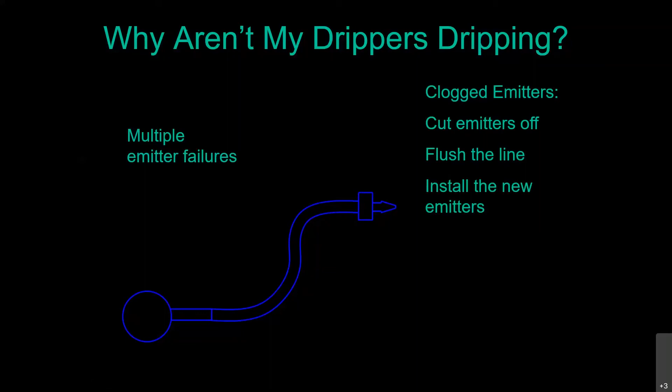If that's not the case and you cut all those emitters off and still no water comes out, that's one of the next things we're going to talk about. The other thing it could be is what I'm referring to as pinch tubing. The whole idea of our irrigation system is to grow roots, and hopefully we're successful with it. Unfortunately, sometimes the tree root grows along where the tubing is and it pinches it off.

So what you're going to do is dig between your last good emitter and your first bad emitter and find out where it's been pinched by that tree root. Now that tree root that has pinched off your tubing, do not cut it so it doesn't happen again. Reroute the tubing further away from that root so it doesn't happen again. The tree root holds the tree upright in the ground. Don't be going out there cutting the roots of your trees. Bad idea.

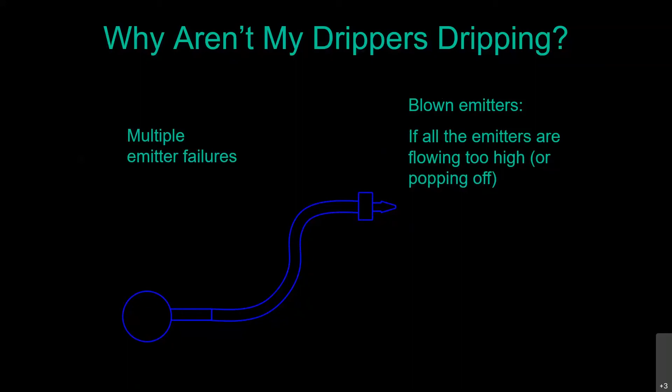Okay. So the other thing we can have out there is multiple blown emitters. All the emitters are flowing too high. We know they're pressure compensating, but even still the pressure's way too high, or they're even popping off the ends of those 1/4-inch spaghetti lines. Could be a faulty pressure regulator, or unfortunately, many times we see these drip systems put in improperly where they don't have a pressure regulator. So if that's the case, you're going to want to install a pressure regulator, or you can actually test it to see if it's actually operating.

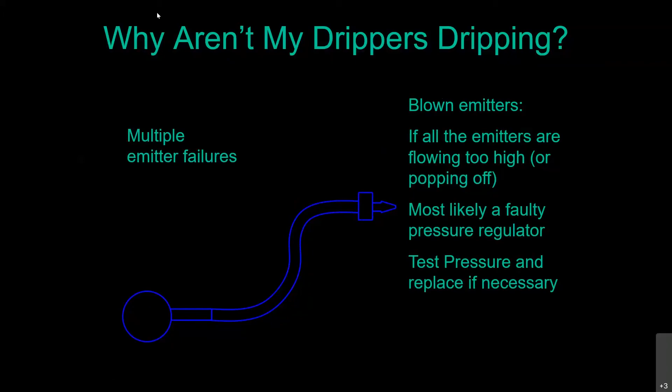And real quickly, I'm going to show you why it's a real great thing to use those threaded end caps instead of those figure 8 end caps. To test what the water pressure is at your house, you can get a gauge that hooks up to your hose faucet. So when nobody's using any water inside, you hook up that gauge and open your faucet, you can see what your static water pressure is in your neighborhood and at your house. So what kind of thread is on the ends of these caps? You can go ahead and put that gauge right on the end of this guy, turn your system on and say, my gosh, I'm at 70 pounds of pressure. Go look inside your valve box. Either you have no regulator or it's not functioning properly.

So I think the last thing we're going to talk about here, and it's just going to take me a moment, is repairing the poly tubing. Yep. So now instead of going through all the individual steps, I'm going to switch back to the camera and just walk you through it. And it'll take just a couple minutes because this is the very end of what we're doing here.

Okay, one of the great things about poly tubing is, like I said, it's very easy to modify, add in more emitters when you want. It's flexible, so we're not stuck in those rigid right angles the way we are with PVC. So you can get the nice specialty poly tubing cutters, and they do work quite well. Cut off that tubing wherever you want it. Most of us just use our pruning shears, though. Let's go ahead and... time to sharpen my pruning shears, apparently.

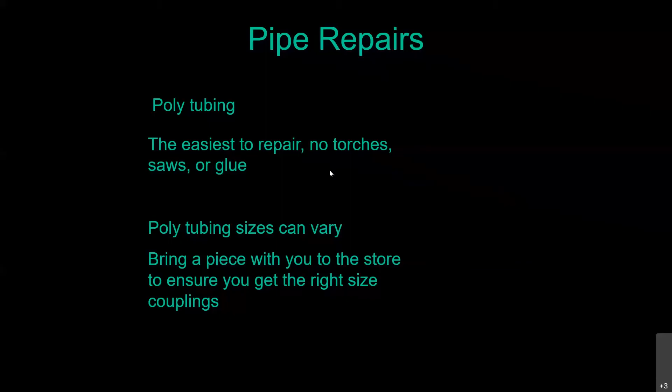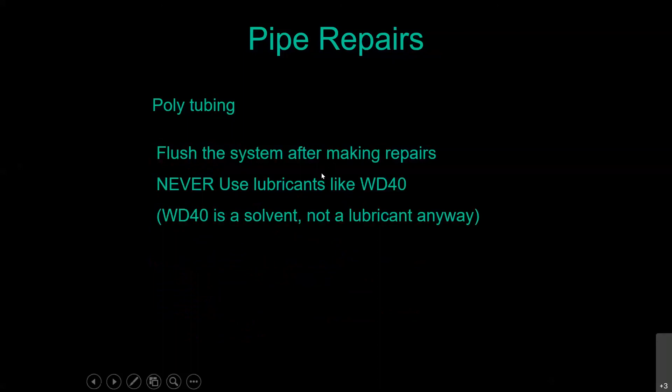Push it in, don't kink it. Get about 1/2 inch or more, don't push it in too far. Flush the system, never use WD-40, it's a solvent. Warm the tubing up, lay it in the sun, immerse it in water.

So you may need more help. Don't forget about the irrigation supply stores. I have nothing against the home improvement stores. I can buy products there. I know which ones to buy, which ones to avoid. But going to an irrigation supply store, you're going to be able to talk to people who have worked in the field on irrigation. Some of those guys at the Home Depots are really, really smart about irrigation. Others, when I hear the advice they're giving out, it makes me think they're really, really good at repairing toilets.

So your irrigation supply stores are Ewing, Horizon, SiteOne, and Sprinkler World. And all these stores have branches all over the entire valley. So just use your favorite search engine for irrigation supply, whatever city you're in, and you're going to find one.

The other thing you can do is the irrigation manufacturers' tech support lines and their websites. So Rain Bird's easy to find, rainbird.com. Hunter is hunterindustries.com. Hunter.com seems to be a financial services company. Toro is easy at toro.com. Irritrol is irritrolsystems.com. Now this company used to go under the name of Hardie. It's the same company, they just changed their name. So if your product says Hardie on it, go to irritrolsystems.com and you can find information on it.

Find information on your sprinkler nozzles, your drip emitters, are they pressure compensating or not? You can download the manual for your timer there because most people don't have it anymore. With that being said, I hope we were able to at least get you a little bit more clued in on your irrigation system. So that way, if something does go wrong, you're not going to be terribly freaked out. And we'll go to our last little slide here and turn it back over to Drew.